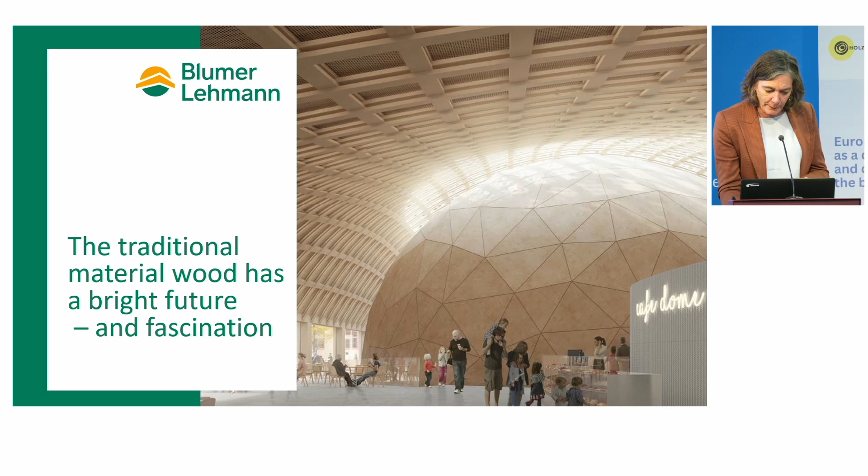Welcome everybody to the European Wood Circle, and I think we have a lot to talk about today. As Uwe Kies mentioned, I'm talking about the traditional material of timber. 550 people have been working for 149 years in Gossau on the topic of how to bring that material, which is growing next door, into constructions, and also doing the sawing of the material.

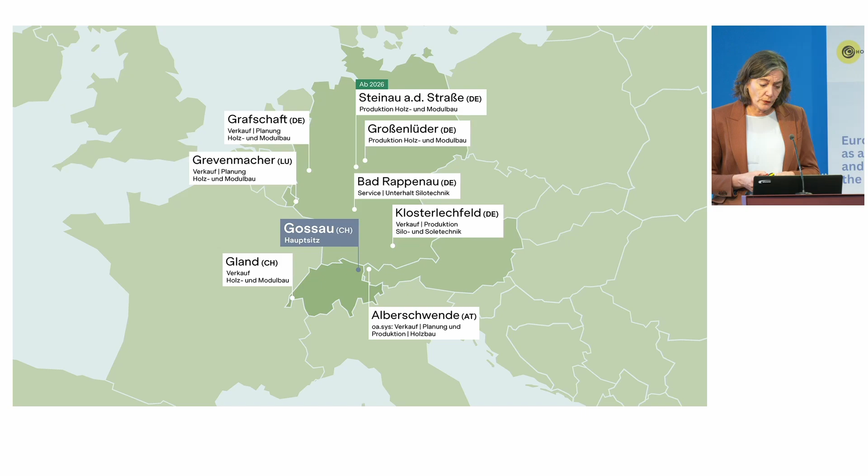We are not only working in Gossau, we also have subsidiaries in Germany, Luxembourg and Austria, as Uwe Kies mentioned, because we want to bring technology also into other markets and other opportunities. But what we do is work in the whole wood life cycle.

That's what we did for the last 140 years, and that's what fascinates us. So we bring in the logs, and at the end we transport the rest material out, or transform it to energy or to 40,000 tons of pellets, because that's the sustainable use of the resource, even if it's not long-lasting. I'm coming back to it.

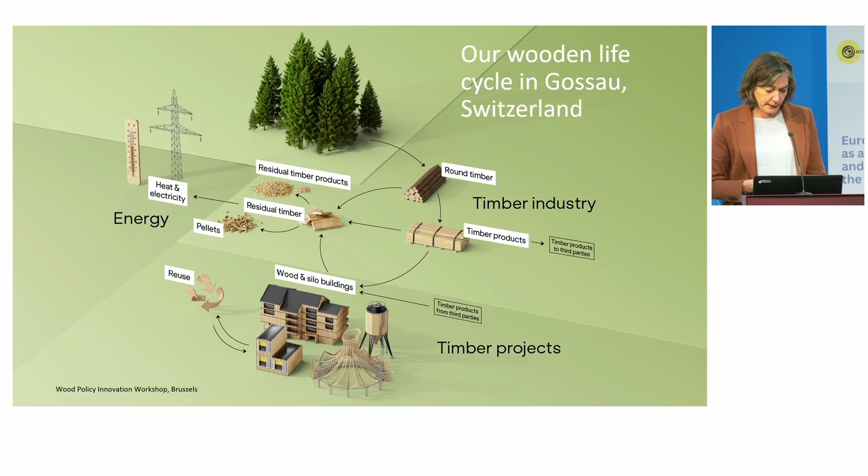In the construction industry for the last decades, when we look back, we had this traditional form of wooden houses or farmhouses. Then about 2000, we started to do wooden buildings or wooden single-family homes, which was at this stage very innovative because nobody could imagine living in a wooden house.

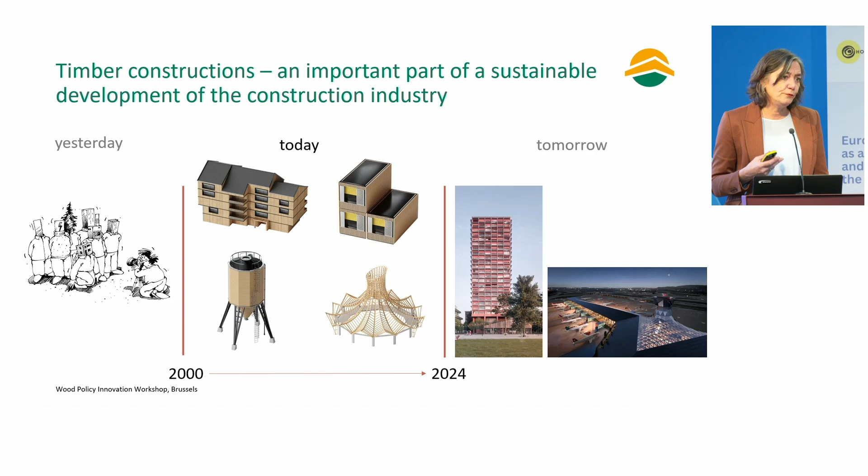During the last 20 years, the projects grew bigger, grew more innovative, and today we are faced with a decade where we have to find the technology to come back to the cities, also to build higher and to build larger.

What it needed for this distance was not only the topics I'm talking about at the end of the presentation, but also the topic that building with wood is not only sustainable in an ecological way, it's also a great contribution to climate-friendly construction. And also serial and modular constructions contributed a big amount to a more sustainable world.

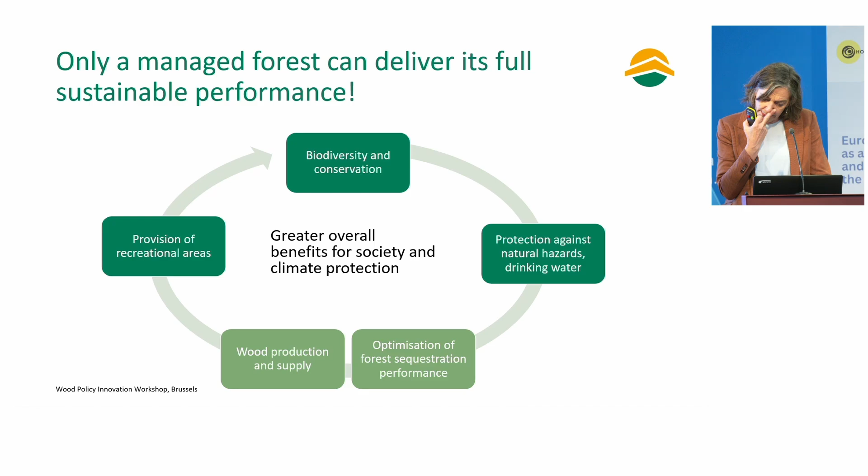Wood products as a lever to decarbonize the built environment are also grounded in a wood-based value chain. Uwe Kies has mentioned the various functions of the forests, but I only want to emphasize two highlighted green buttons: the cruciality of wood supply or wood production for the whole value chain, and the effect these activities have on the climate through the sequestration performance of the forest.

I say this very clearly for everybody who has the vision that not using the timber in the forest is the best thing to do for climate: this is like a full vacuum cleaner bag which stays in the forest and doesn't do anything for 50 years. This is not a concept for the future.

Please take home that the older the trees get, the less sequestration action they have, and it's really crucial that you think about using the forest, optimizing it in terms of fitness for reacting to climate change, and produce long-life wood forest products for construction and industry, because this is the storage for the future.

It also substitutes a lot of material, including fossil-intensive materials, and at the end of the day we will all be able to do climate-positive buildings. That's the substitution effect of wood. If you see, concrete is using almost exactly the amount of carbon that India does as a whole economy.

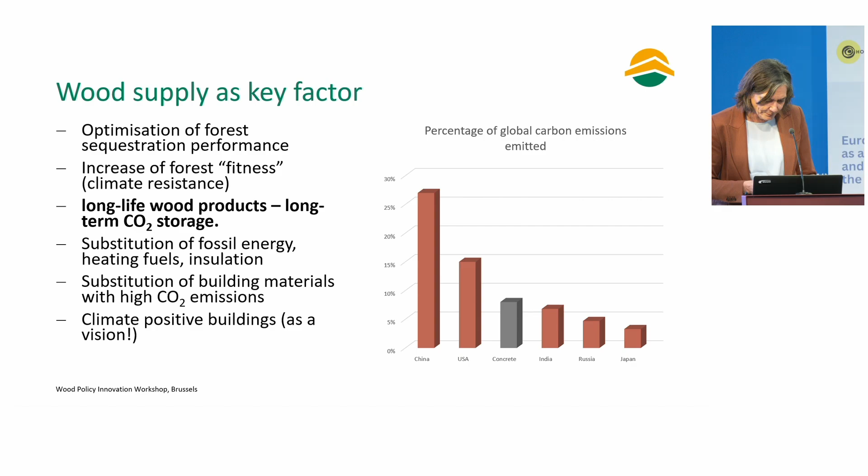And let me say another topic: we all talk about circular economy, and the first action to optimize the circle of forest and wood-based industry is to extend the storage factor.

The more we use wood, the more we store, and the more we contribute to a higher storage of long-life stored carbon. Prolonging it means reusing it, but the effect is much lower than extending the storage right from the beginning, and now action is needed.

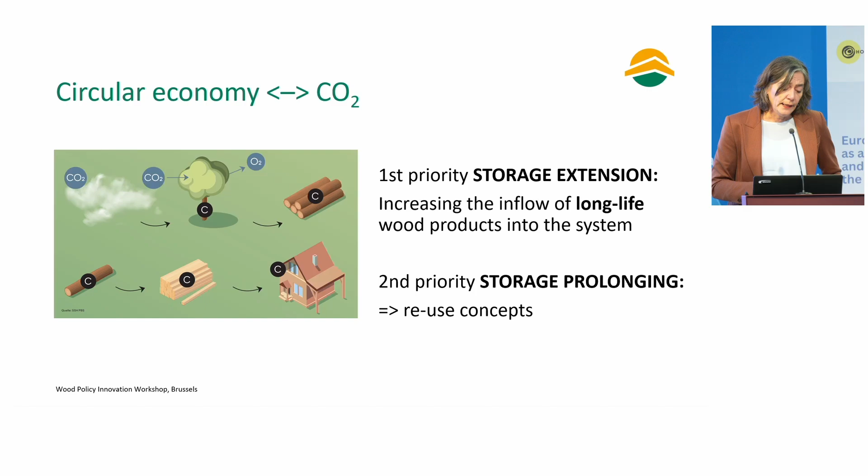The timber industry plays a crucial role in that transformation, producing semi-finished products using mainly fir and spruce, because this is needed for the construction industry, since today all the normation is based on those species.

The timber industry really looks at all these products being reliant on existing regulations and standards, and also circular, maybe not yet needed to be dematerialized today, because in some regions of Europe we have the problem that we don't know where to sell our product.

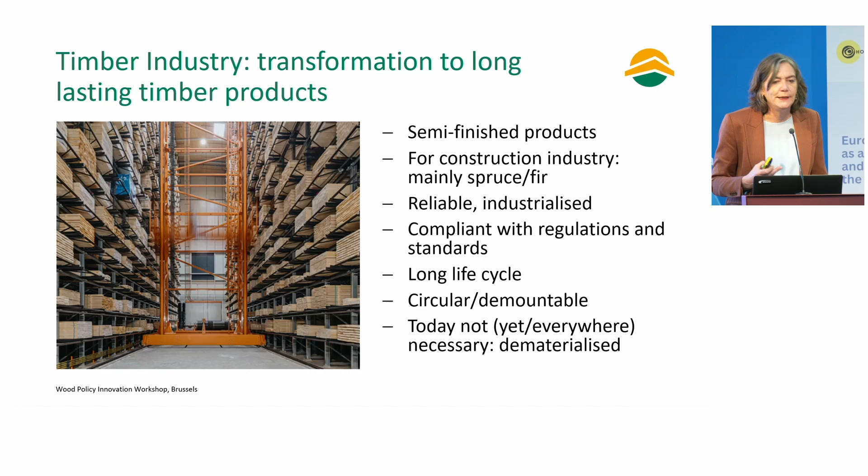And if we don't find long-life circular timber constructions, we have to deliver it to pellets or to the packing industry, and this is not sustainable in the long run. So please consider that even if you think CLT is not the material to use because it needs too much wood at the moment, that's fine, because the more carbon we store, the better.

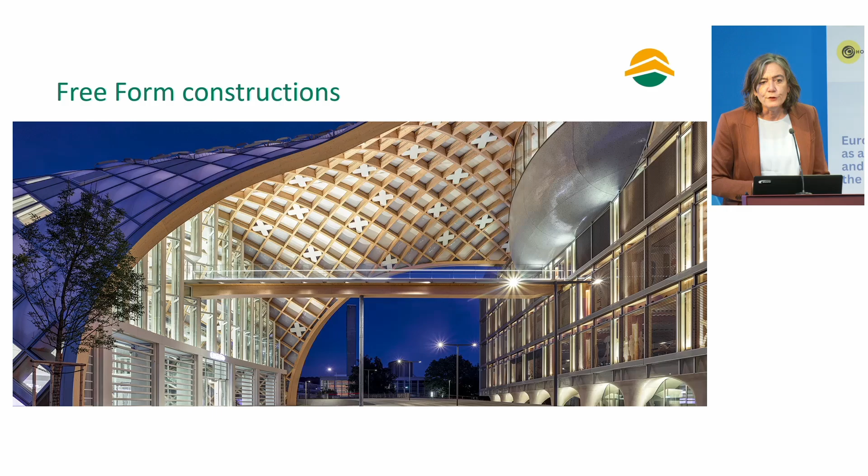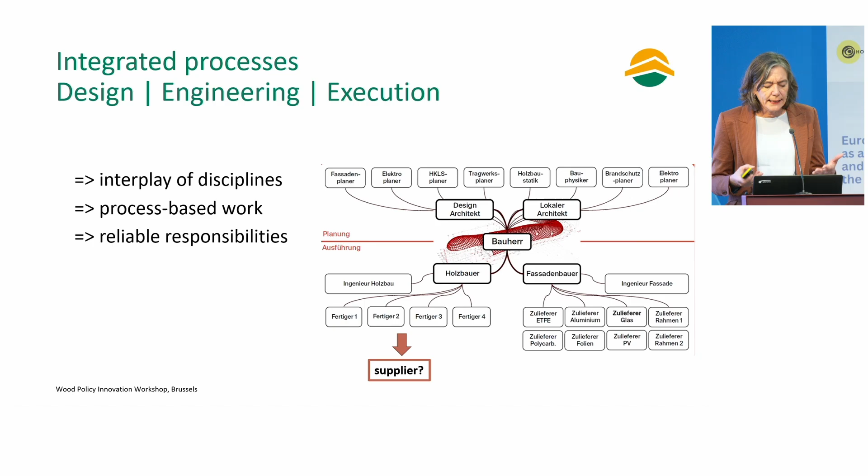Let's have a look at timber constructions from freeform to standard. Freeform constructions are model-based planned constructions, like you see here, an interplay of disciplines, process-based, IT-based, and in the end you get the information that you can produce.

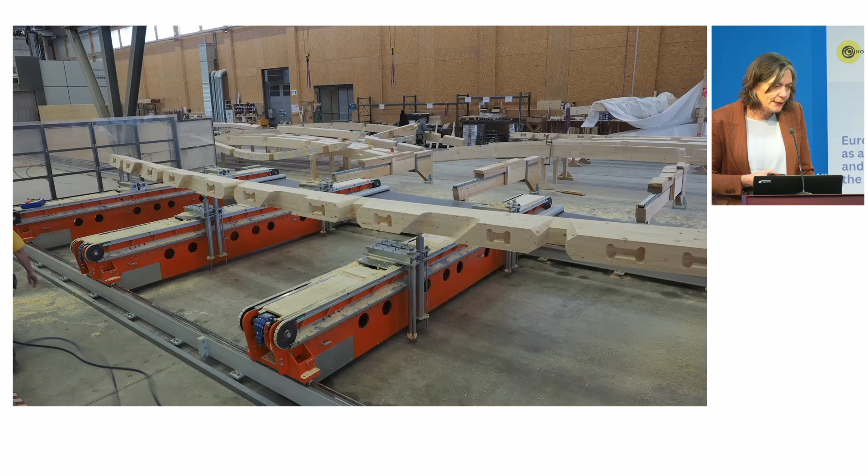These beams, as you see here in these pictures, in this project there were about 4,600 pieces, and you bring them together into constructions like this. At this moment this building looked the best because today there is a skin on it and it doesn't look that nice.

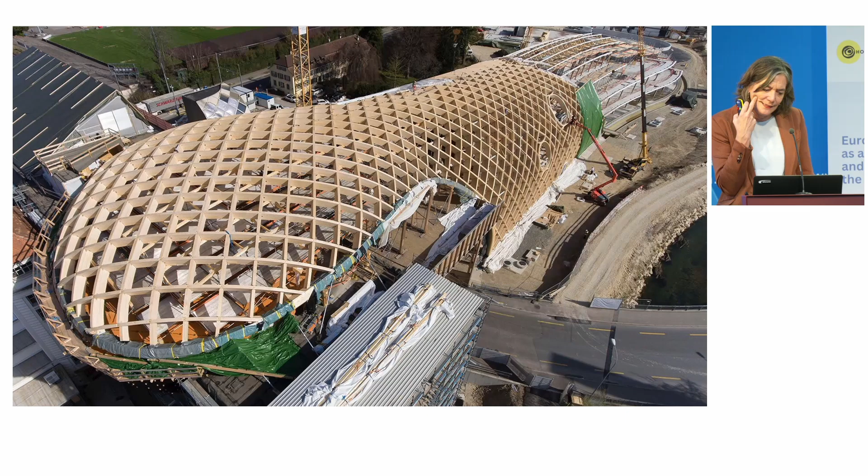A 72-hole golf resort in Korea, which also shows the possibilities of timber, or a golf resort in Saudi Arabia, and also tourist villas and facilities for tourism in Saudi Arabia.

You could all think, is it really necessary to build in Saudi Arabia, or to do it in wood? Yes, because the substitution of concrete is a topic there too, and if the European industry can bring the products there, it's more sustainable than leaving it to the conventional construction industry.

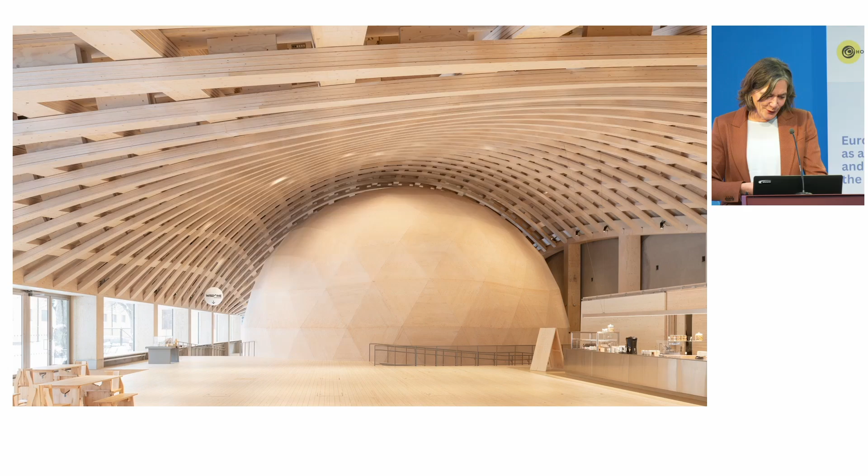At the end, I warmly invite you to go and have a look how it feels living in those kind of buildings. Another example is Wisdome Stockholm.

A beautiful example we did with our Scandinavian partners with LVL. It's an example of how you do innovation with existing products and bring them into construction.

And a mosque in Cambridge, which is a beautiful example that you can also pick up historical architecture and innovate them to really beautiful buildings, which you can see, and it's open to the public.

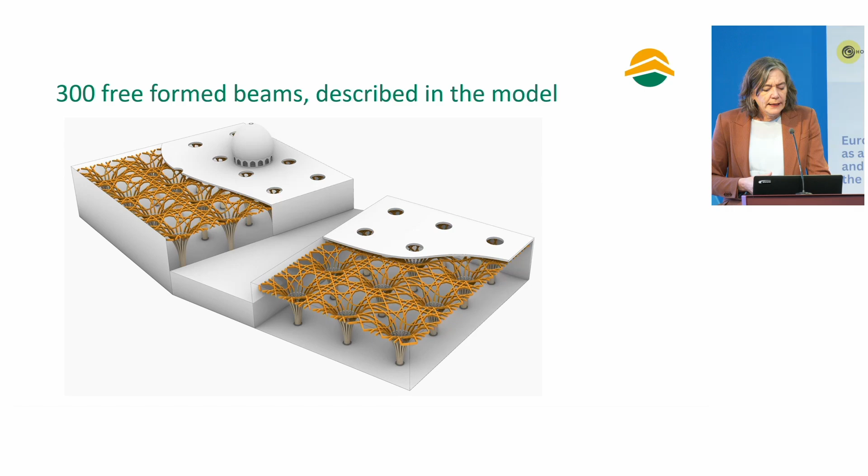It was modeled in a parametric design, as you see in this picture. It was brought down to 300 beams. They were produced in Switzerland and then brought to Cambridge.

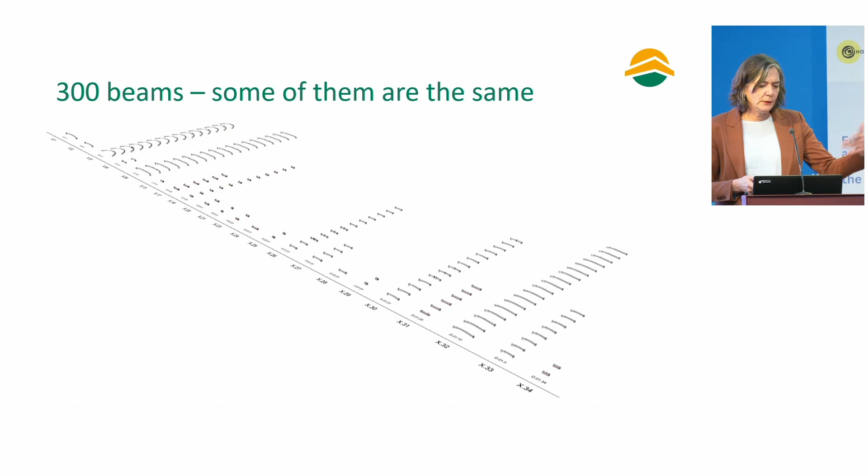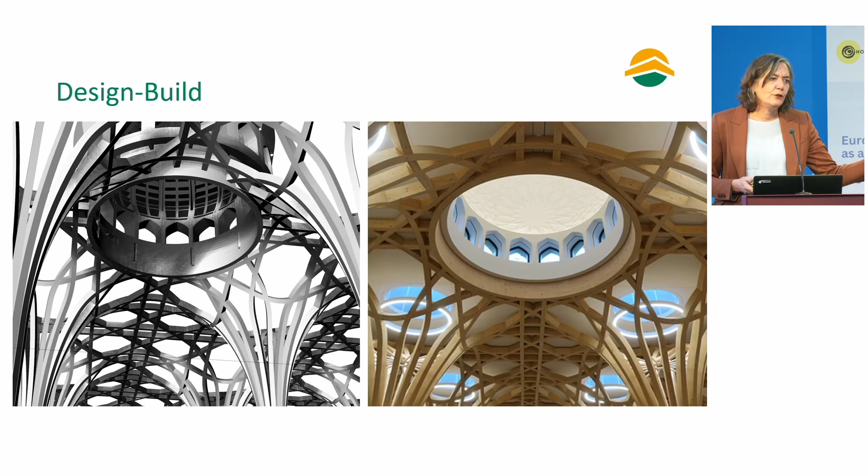And this is design build. So you've got an idea, you develop the model, and you produce the beams, and in the end it looks like that. This was one end of the sausage, or maybe timber beam.

The other end is a standardized, prefabricated or modular building.

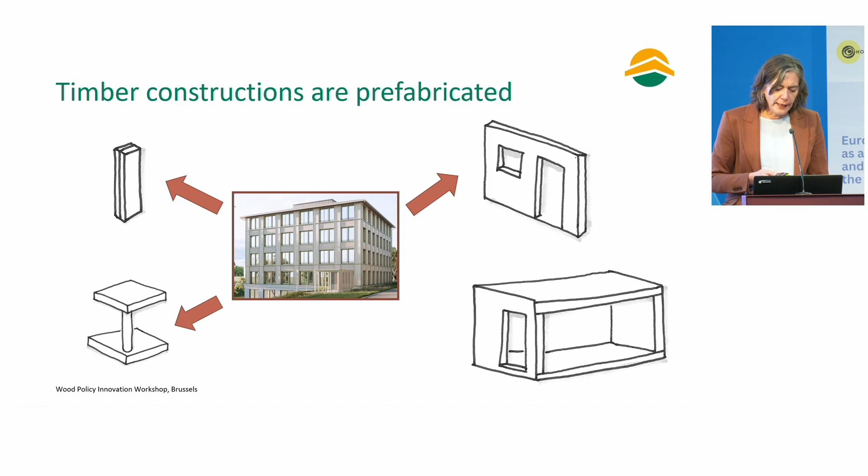You can bring constructions to the construction site with beams or in separate parts, but you can also do the prefabrication in your facilities in the form of elements and modular buildings.

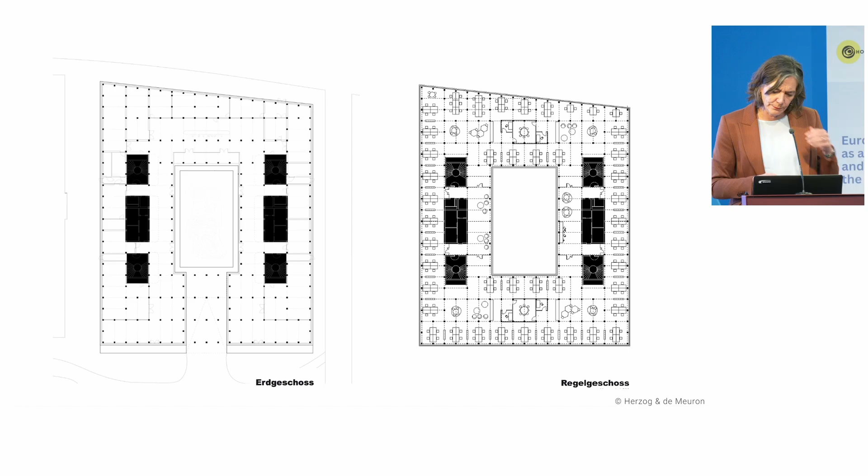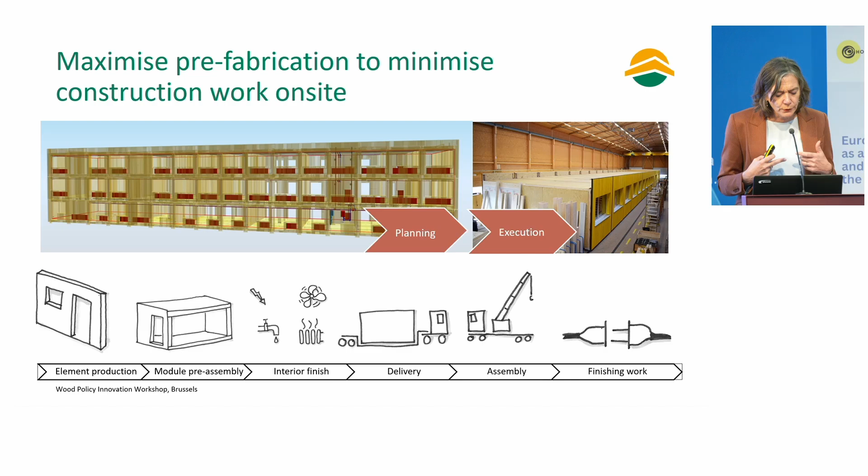Modular building goes one step further, because you take all your subcontractors into your company and maximize the prefabrication to the max.

We often do modular buildings for schools because they're easy to order, and they're built in a very short time.

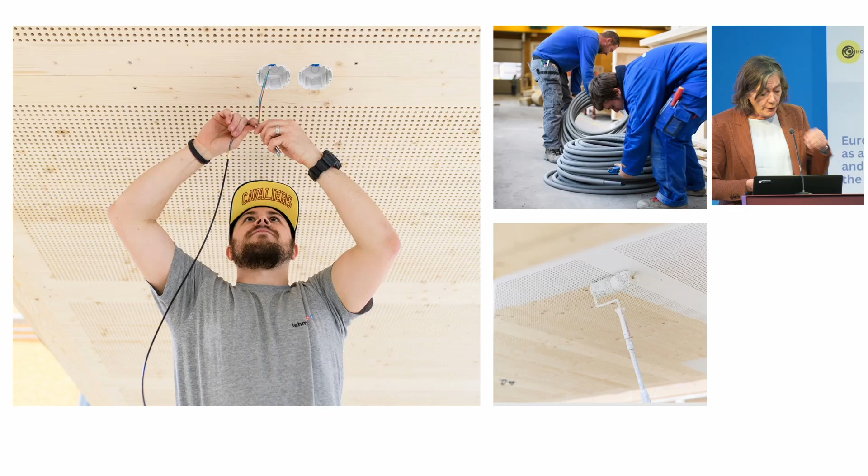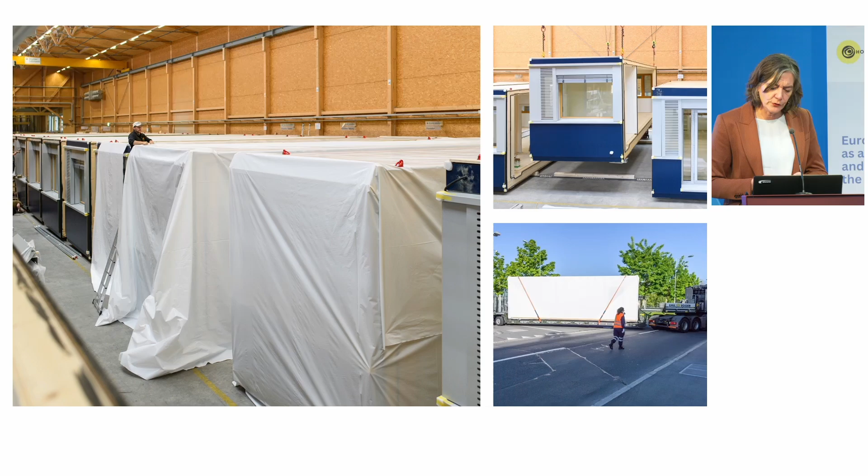Produced off-site in our factory, everybody comes to the factory and brings their skills in. They are protected during storage and transportation, and then built on the construction site in a very short time.

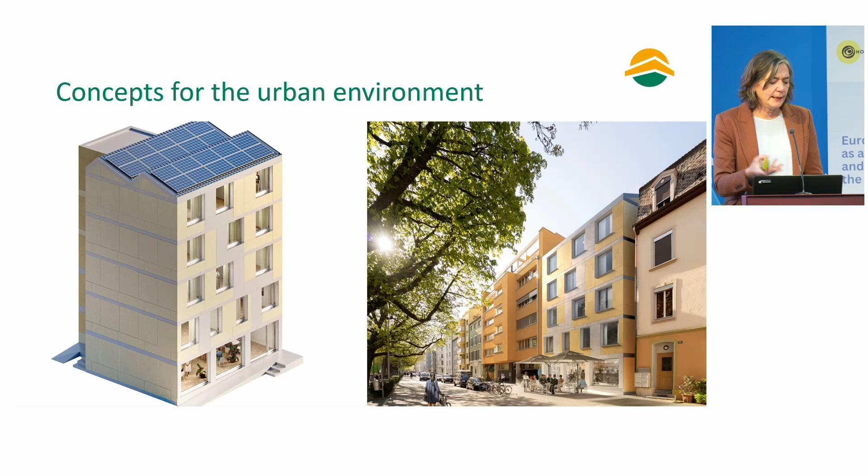Also combinations of modular buildings and elements, like here with the example in Dresden, or gym halls, which can also be standardized, or an idea of a concept for the urban environment.

Yesterday we almost only did school buildings, because this was the most attractive market, also because these buildings were moved during summertime when they were needed on another site.

Today this is a much wider market with different applications, often permanent, with the aim of minimizing construction work on site. One of the most interesting topics is reuse.

You don't have to disassemble these kinds of constructions, and it's more economic than only doing it in parts. The question is, can you scale that? Can you also do this form of construction for more cost-effective building, to solve the living costs issue?

It will be possible, but only with standardization. Standardization is the key word, and that's the beginning of a more efficient building industry, where timber can play a crucial role.

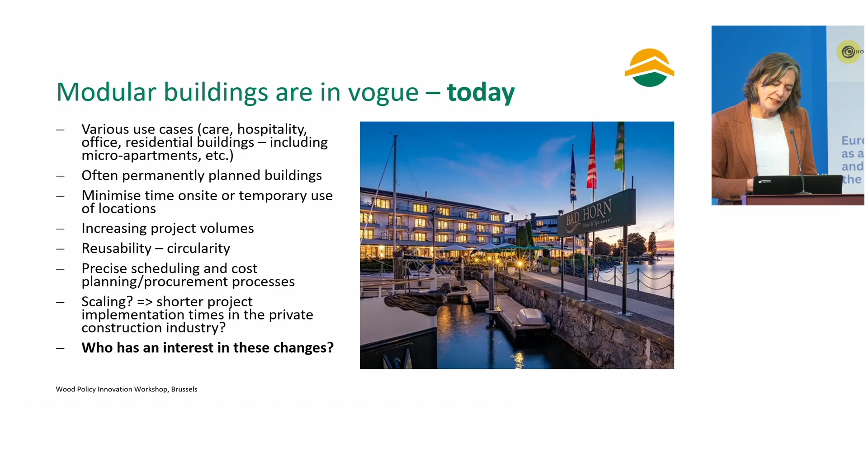The question you have to ask yourself is, who has an interest in these changes? For sure not the builders, the developers of the building industry, for sure not the general contractors. So try to bring together the offer of this kind of building with the demand for it, and then you will be much more cost-effective than today.

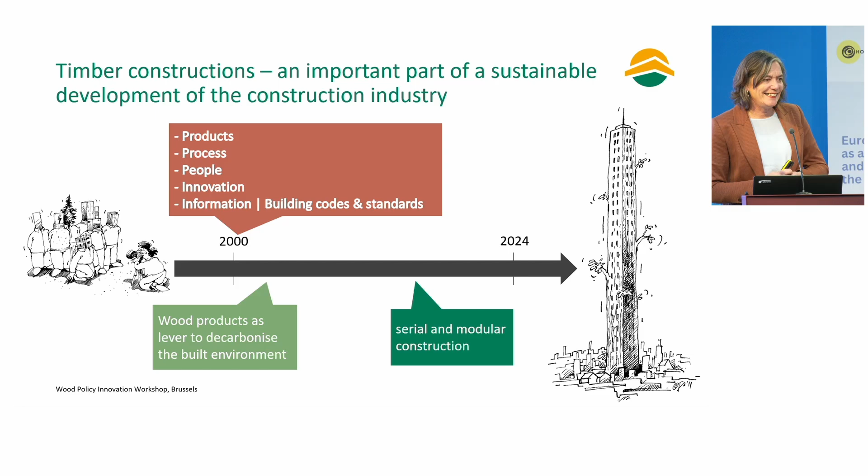So I close with the red square here. Uwe Kies has already said it: what we need for the future are products, process, and people — meaning sustainable and long-lasting products.

And of course also process, which means efficient and optimized processes in planning and production. And we need qualified and motivated people, which means advanced, modern and interdisciplinary education across the borders. That's the three crucial things.

To be more successful in the construction industry tomorrow, also in contribution to climate change, there is also responsibility and attention needed for wood-friendly standards, codes and norms — please, harmonized norms and regulations.

That's also part of the more effective work for all the engineers and builders or timber construction companies in Europe. We need innovation, R&D, and also pilots to demonstrate what we can do.

We need an integrated value chain, an exchange of these topics, and an integrated approach of long life cycle products and timber products within the chain. And we need more collaboration, trust and partnership across the sectors and within the sectors as well.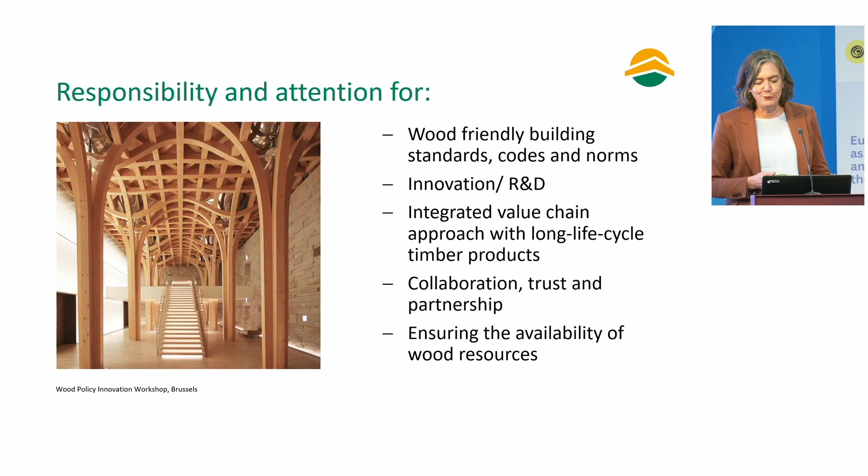And again, we need to ensure the availability of the wood resource we need for our companies, so we can become 150 years old through all these challenges.

Thank you very much. I strongly believe wood has a bright future, and if we use it wisely, it will be a great contribution to climate neutral constructions, but there will be a lot to do along this way. Thank you very much.